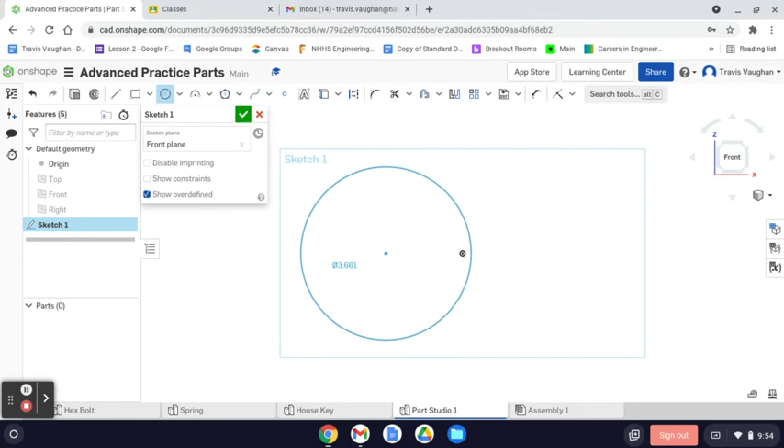What I want to do is grab my center point circle, and we're going to start a circle, but we're going to start it out here away from our origin point. I'll explain why here in just a minute. We want to make sure we line it up with the origin point, horizontal or even with it, but we don't want it on it.

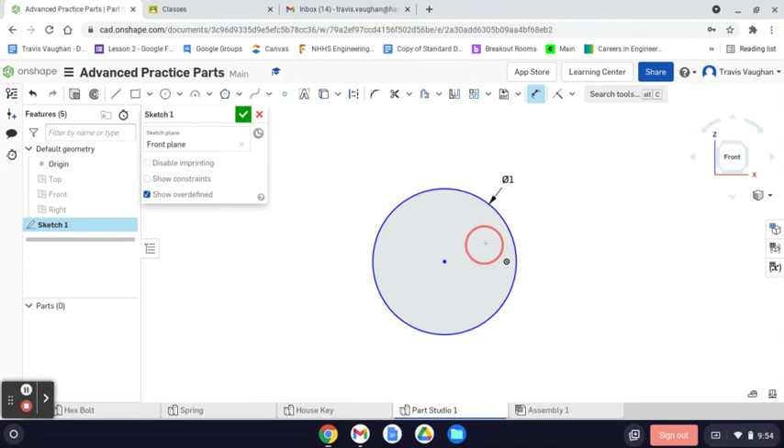Once you've done that, then we'll dimension it. Usually the size of a key head is about 1 inch, so we'll say 1 inch, and then I'm going to zoom in here. That looks good to me. We just want to make sure that this origin point is inside the face of the circle right here, okay? We don't want it to be outside of the face of the circle.

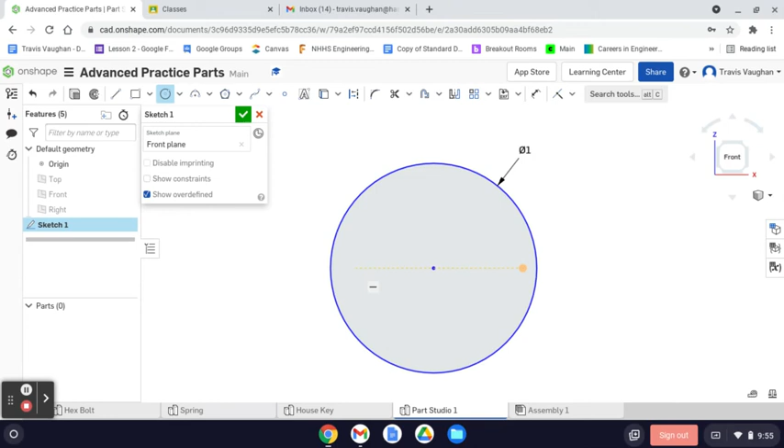All right, so now grab your center point circle again, and we're going to come over here, even with that origin point, and we're going to put a little hole in our key to allow it to go onto a key ring. So this one we'll say 0.125, and that is a good size for a keyhole.

All right, so once we've done that, we are ready to start drawing our key. We're going to stay in sketch one, we're going to have a lot to do in sketch one. So we're going to grab our line tool and we're going to create our key.

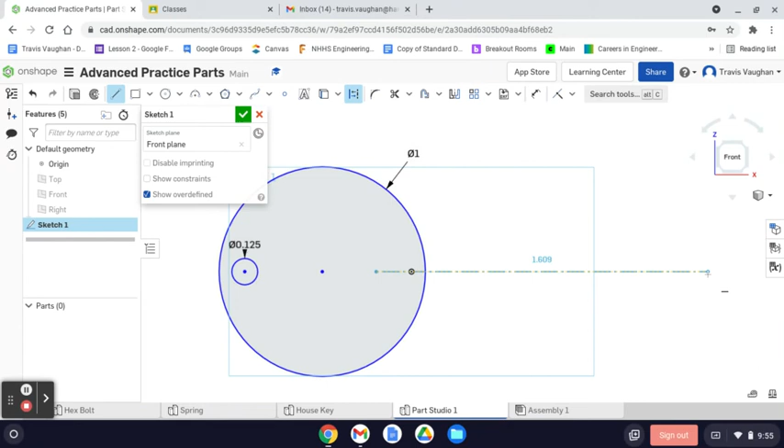We're actually going to create a construction line. So L, Q. And then I want to be even with this origin point, but I don't want to be on it. I'm going to start my line back here and extend it, and we're going to go out here. Let's see, how long do we think our key should be? Well, most keys are probably, we said the head was 1 inch, so we'll make this 1 3/4, so 1.75.

All right, now we're still in our line tool, so hit the letter Q, and that's going to take it out of the construction line, which is what we want. On this one, we're just going to draw a line backwards, kind of an angled line. Now, I'm not going to give you a specific angle here, you can make this angle whatever you want it to be. Just remember, you do need to be big enough up here that we can cut some teeth into this thing.

Okay, so bring it back here and click, and then we're going to draw our line horizontally all the way back to the face of our key. And we're going to click. And then I'm going to hit escape.

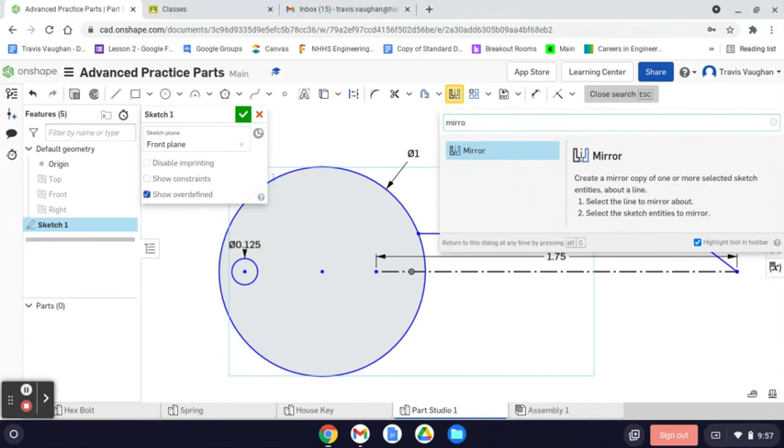Now we're going to use the mirror tool. Mirror tool looks like this. If it's not in your toolbar, and it should be, you can actually come over here and type mirror, and it should select it. All right, so the very first thing I want you to see is it says select a mirror line. That's going to be our construction line.

So we're going to click that, and now it says select what we want to be mirrored. Select entities to be mirrored. So I'm going to choose this and this, and bam, I am done with my mirror tool.

So I can hit escape, and now it's time to start cutting. We're going to go ahead and cut some teeth into our key. So I'm going to grab my line tool.

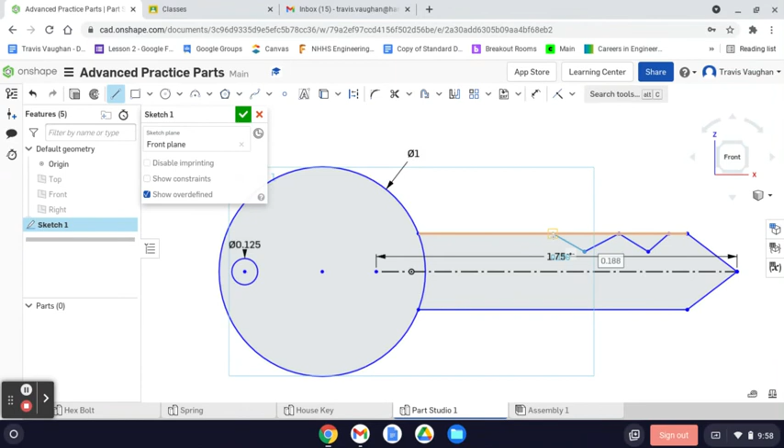I'm going to come to this corner here, and actually I'm going to come a little bit back. Nah, that's good. So I'll come a little bit back starting here and cut down. The only thing I want you to avoid, do not take your teeth all the way to that center line or that construction line. Keep it above that construction line, okay, the teeth of your key. And you can make this pattern whatever you want it to be, okay?

All right, that's mine. So then I'm going to trim it up. I'm going to grab my trim tool and I'm going to trim off the material in between my teeth. So that's going to be the shape of my key.

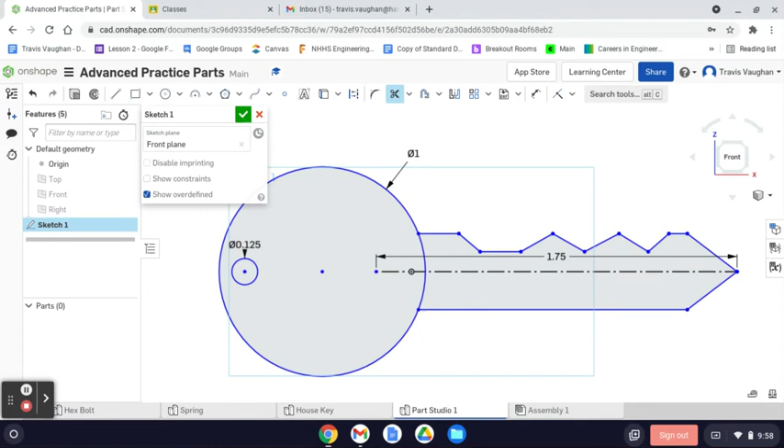Once you get the shape of your key the way that you want it, throw it into isometric mode, hit Shift E to extrude. It's going to go one direction. We're actually going to go ahead and make it symmetric. And 0.125 inches, quarter of an inch, or excuse me, an eighth of an inch is what that is. We're going to hit that green checkbox, and you have the beginnings of a key.

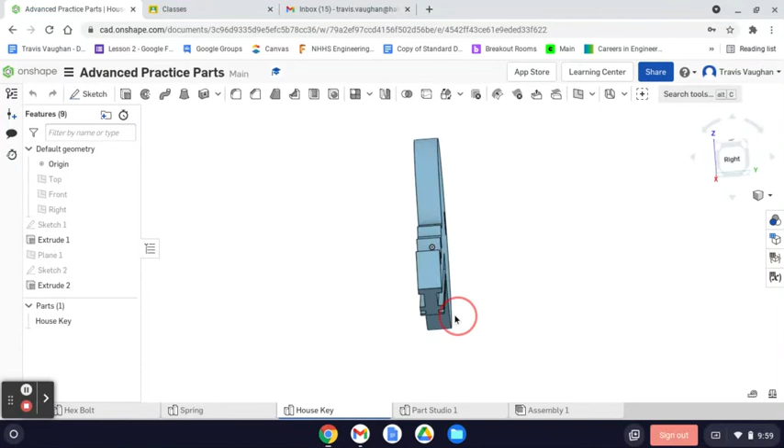That works really well. Now, here's the thing. What you need to understand about a key is if you look at a key, it's got these grooves in the side. And what those do is that allows the key to actually go into the lock. So we need to put some grooves on our key so that we can actually insert it into the face of the lock. All right, so here's how we're going to do this.

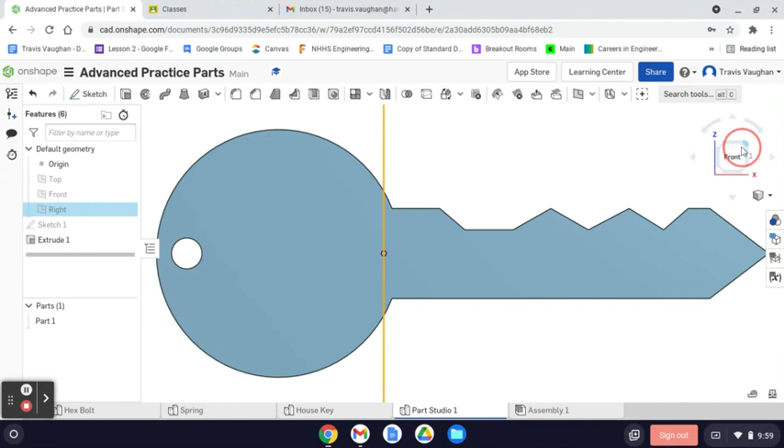We are going to look at our work planes here, and we need to find the work plane, and it should be the right plane. What the right plane does is it bisects our part. That's what we want right there. So we're going to click on that right plane, and then I want you to click on the front face of your view cube so that you can see your right plane highlighted there.

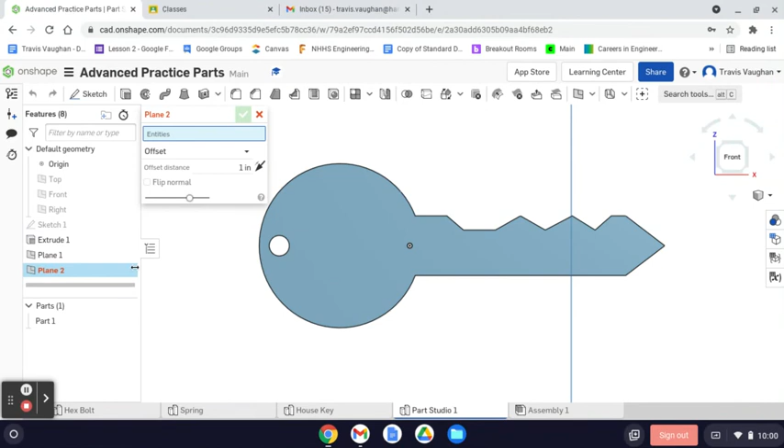And then we are going to use a tool called plane. So you're going to click on the plane up here. If you can't find it, come over here and type plane, and you'll get to the same thing. All right, so our plane tool, whoops, hang on, let me go back out of this. I accidentally did something wrong. All right, so let me get rid of that.

All right, so we've got our right plane selected. Okay, so you got your right work plane selected. You're in your front view, so you have that view right there. You're going to click the plane button, and it's going to offset it. And it says, how far do you want to offset it? What we're doing is we're giving ourselves a work plane that is in a different spot than our original plane. All right, so my computer's kind of lagging here on me.

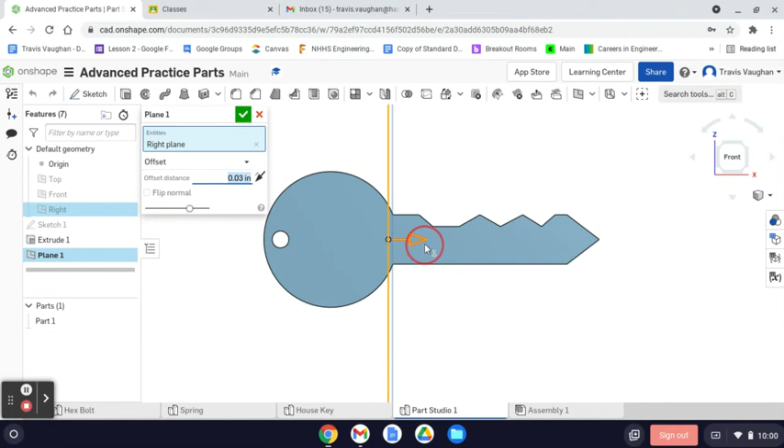What I want you to do is zoom in here, and we want to try to get this work plane to where it is even with this corner right here. And I believe on mine at least, it's going to be 0.04. Nope, it's a little bit off, so 0.03. You can play with it. Once you've got that pretty much lined up, you're good to go, and you can hit that green checkbox.

At which point now, if you hit that isometric mode, we have plane 1, okay, and plane 1 shows up here.

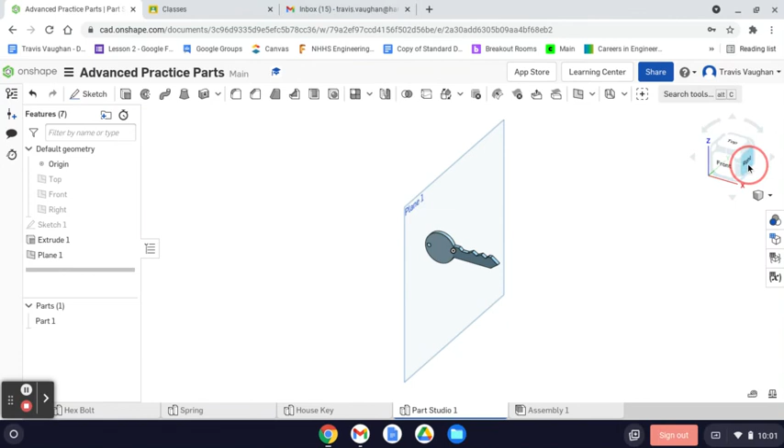That's what we want. So we're going to click on the right face of our view cube, click on plane 1 so that we are straight on, zoom in here, right click, and click section view. What it does is it cuts your key in half, showing you the section where that plane bisects your part, and that's what we want.

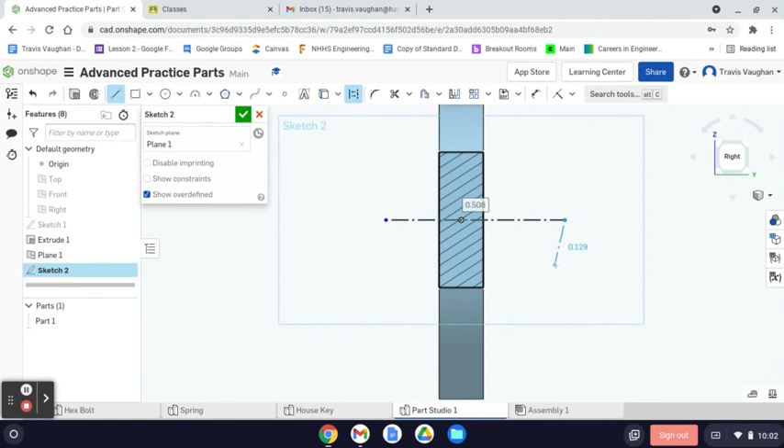So now we're in the section view. We're going to click on plane 1 and start a sketch on plane 1, then zoom in here. What we're going to do is make sure that everything we do is below this origin point. I'm going to draw a construction line right here so that I can see that's my safety line.

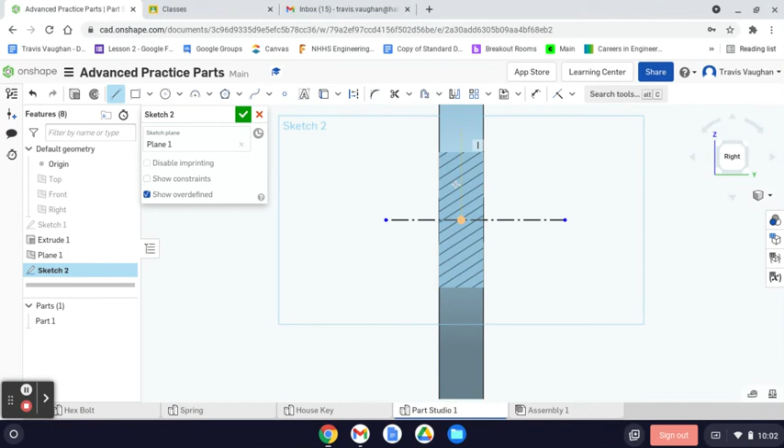I do not want anything to be above that safety line. Now I'm going to grab my corner rectangle and go anywhere below this line, and we're going to cut into our key. Actually, before we do that, let's draw another construction line, and this one is going to go vertical. This is going to serve two purposes, and I'll show you what those are. Make sure you make that a construction line.

Now let's grab our corner rectangle, and we're going to click out here, making sure my rectangle is below my upper line, and we want to stay to the side of that center line. I can go almost all the way to it, but I don't want to go all the way to it. You guys can decide how big your rectangles are going to be. I'm drawing two. All right, and that's going to be mine.

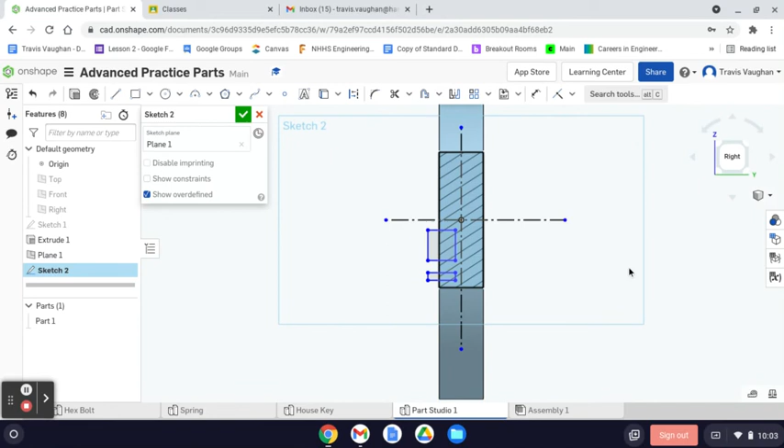Once you've done that, we're going to use that mirror tool again because your lines are actually on both sides of your key. So we're going to grab this center line right here, and that's going to be our mirror line. Then we are going to select the four sides of our rectangles. Once we've got those, we are good to go.

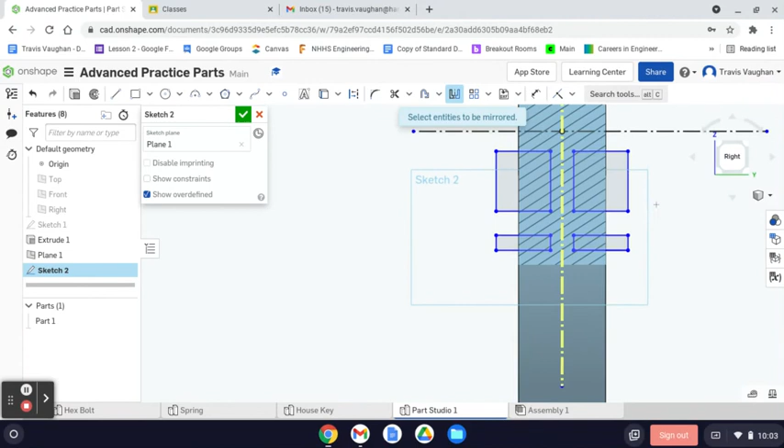We're going to throw that in isometric mode, and we're going to get out of our tools. So hit escape, escape, escape. And we are going to right click and say turn off section view. When you do, it's going to turn your key back on.

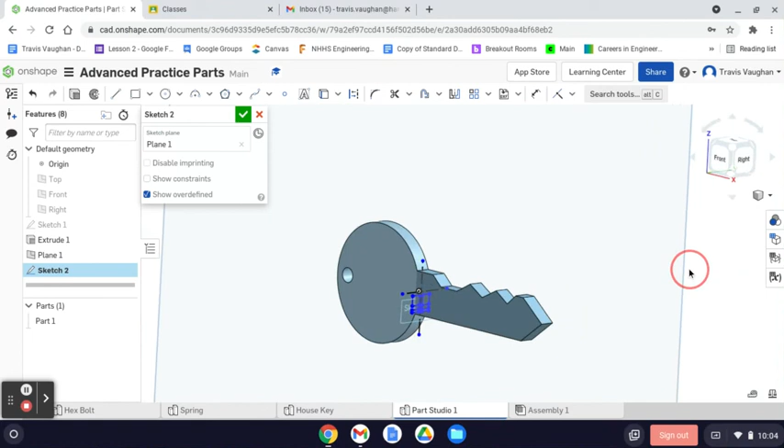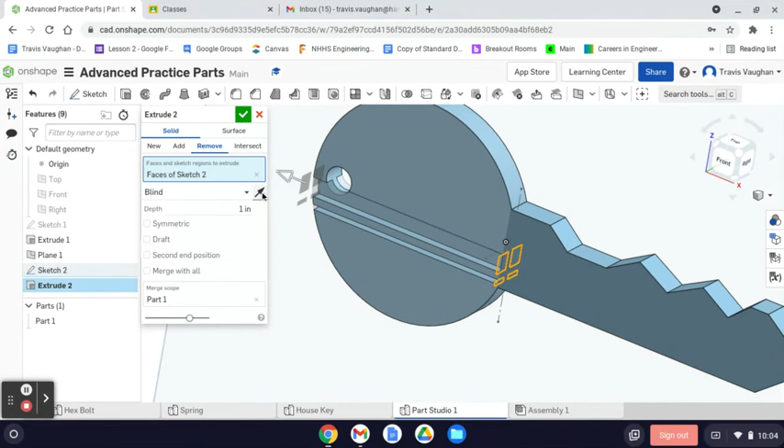And now we're going to extrude. But when we extrude, we're going to have to select our rectangles. So Shift E, and then we're going to slide in here, and it looks like it already selected them for me, which is nice. If not, you can slide in and select those rectangles. We don't want to add material, we want to remove material. It tries to remove it the wrong way, so I'm going to click that button, and we want this to go through all so that it comes all the way out the end of our key.

That looks good. Once you've got that, hit that green check box, and you can hide plane 1, throw it in isometric mode, and you have created the key. So right click on your tab down here, rename it, call it house key. Right click on part number 1, rename it, call it house key, and you've got your key.

And the neat thing is everybody's keys will look different. You can put one slot down there at the bottom, you could put two, you can have ten teeth, or you can have just a few teeth. You could have this thing looking like a crocodile if you wanted to—however you want to build it. So there you go, that is the house key.